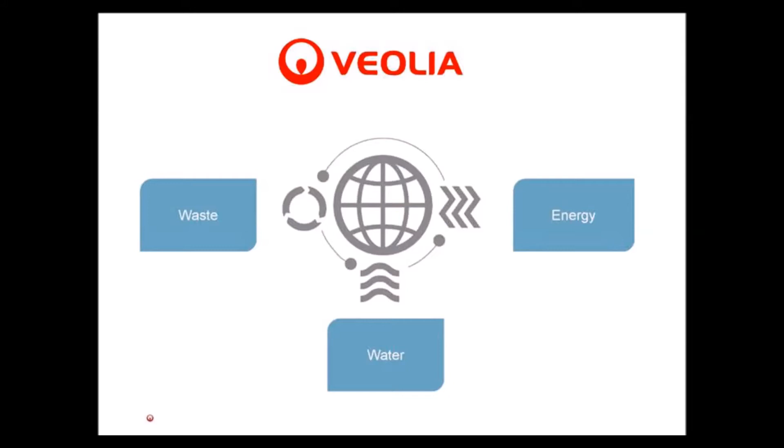So Veolia Water Technologies, as you can see, we have a wide range of solutions, dealing in design and build process water treatment systems, looking to move from borehole water quality to production quality, whether that's in the brewing industry, dairy, soft drinks, food and beverage in general, or whether it's pharmaceutical or in the healthcare industry. We have a laboratory system where we actually have a research and development system here in the UK where we actually build all this equipment as well, whether that's looking at quality control within your factories or, again, as we've already discussed, in hospitals or in healthcare.

We have systems to meet your requirements for utility water to help you meet the regulations and also to reduce costs, whether that's with boiler feed, cooling water feed or pasteurisers. We have a process wastewater treatment division. We have a large design and build solutions team based up in Birmingham, and they can deal with full treatment or partial treatment, whether we're just looking to reduce your costs on the Mogden formula or whether you're looking at full recycling through an MBR process.

Here in High Wycombe, we have our service division, and we have 64 engineers on the road at any one time, and we can offer a variety of customised service packages to meet any site's requirements. Through Hydrex, we have our water treatment chemicals business, again focusing on boilers, cooling towers, pasteurisers, anti-scalants for process water treatment. And we also have our mobile water services.

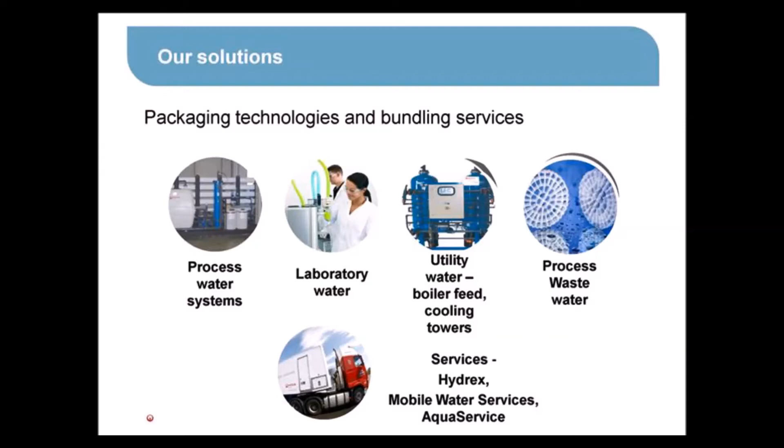So, what are the hygienic design standards that are driving these quality changes? Well, as you can see on the screen there are any number of existing legal requirements and international standards and directives that are being applied to beverage production. We have the Codex, which looks at hygienic practices for each food type, right the way through to the machine directives, and EHEDG, the European Hygienic Engineering Design Group, which look at specifying specific valves and design systems to help make the systems more hygienic.

So I think it's very interesting that under the European law, water is only classed as food from the moment it goes into the production process as a raw material or the moment it goes into a bottle. And to avoid problems with increasing hygiene legislation, we're continually being asked to look at hygienic design, not only for the water treatment plant, but the entire process. Now, whether that's a filling line or whether it's a washing line, the hygienic design doesn't just stop at a piece of equipment, it's about the entire process.

There is no actual specific guideline for water in all of those regulations. There are actually more regulations regarding conveyor belts than there are specifically for water. So it's the job of companies like ours to go through all these regulations and find out exactly what these quality drivers are that are driving the change towards hygienic design.

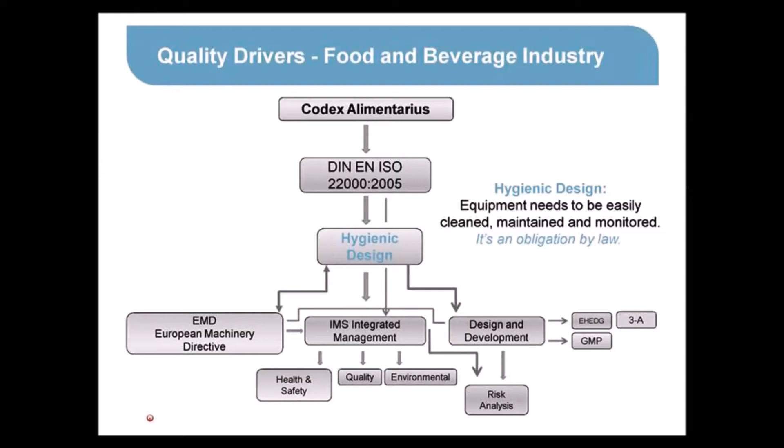If we look at market trends, and these are really quite important, what's actually trying to drive the effect of the change as well as these legislative requirements? As was recently discussed at the Campden BRI members' interest groups, chlorates and perchlorates, there is legislation coming through on these now, actually trying to find what the detectable levels that will be allowed within food and beverage going forward. And to actually aid this, there's now been technology developed to actually detect the levels of chlorates and perchlorates within beer.

So obviously the use of chlorine in water, whether it's coming from town's mains or whether you're adding chlorine for your cleaning purposes, we're going to start facing real issues right across the food and beverage industry by adding these cleaning chemicals. In terms of sustainability, how can hygienic design help here? Well, the cleaner the system, the less cleaning is required, which means increased availability of the system for production, but also less cleaning equals less chemicals or heat required, which means less energy and less waste.

So what we're trying to do is look at systems that not only apply to these market trends, but also to the legislation, so that the system that you get is future-proofed against any pending legislation. We don't want to be installing systems now that in 2 years' time don't meet the legislation and need revising. We're trying to design systems that meet all these requirements now, and therefore we have a future-proof system for the next 20 years.

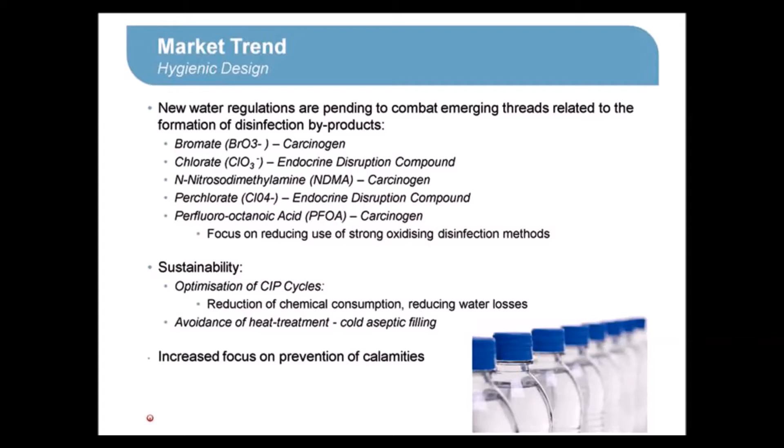So, what else is driving these market trends? Well, as we've got there, we've got maintenance. If you break into a system, you of course run the risk of introducing contamination, whether that's through bacterial infection or whether that's through using the wrong sealants, for example, or introducing swarf from pieces of processing. If you introduce contamination, you need to clean.

So obviously, increased maintenance means increased cleaning, which means increased cost, which means decreased availability of your system. So we're looking to hygienic design to help reduce the amount of maintenance required, and therefore obviously improve the amount of availability and reduce the OPEX costs of the system going forwards.

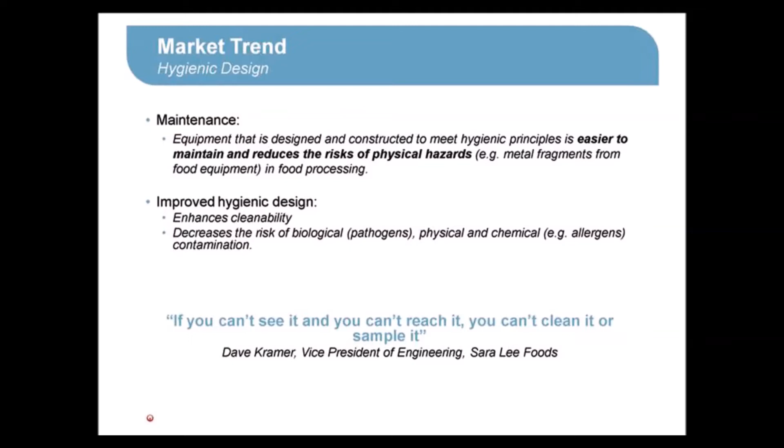So cleverer people than me have trawled through all those legislative requirements, and they've had a look at all the relevant regulations and come up with a list of what would be the demands on a system. Now, this doesn't just apply, as we've already spoken about, to the specific equipment itself, whether that's a reverse osmosis system or a carbon filter. This is going to be to the delivery system, the pipework, the interconnecting pipework, right the way through.

And so we've actually looked at systems that are designed to meet these and to meet any possible future regulation that's coming up. Now, some of these, like I said, they're interconnecting pipework with a slope. This is so we've got self-draining pipework. So a lot of these are common sense, but a lot of these have actually been legislated for and will be law.

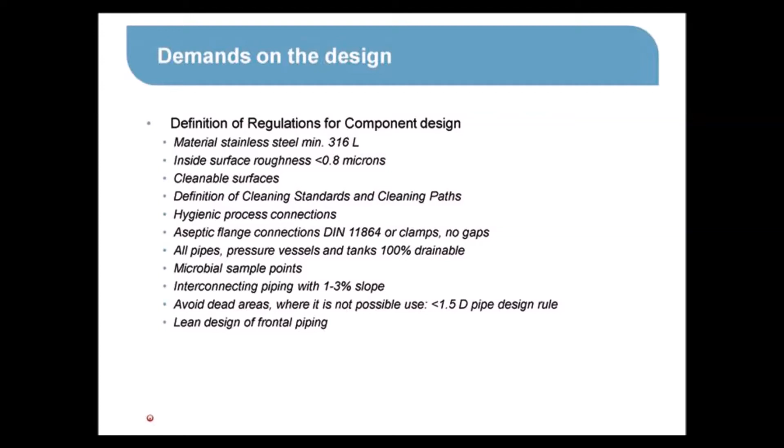So if we have a look at a couple of these in a bit more detail, this is a fairly straightforward example. You can see the example on the left-hand side where the thread doesn't quite meet on the flange there. So when we talk about aseptic, we're talking about bacteriologically free flanges. So EHEDG have guidelines as to the exact joining flanges that should be used, and it's very clear on the right-hand side there, the one with a nice tick above it, that if you don't have any gaps for water to sit and stagnate, you reduce the capability of the system to become infected.

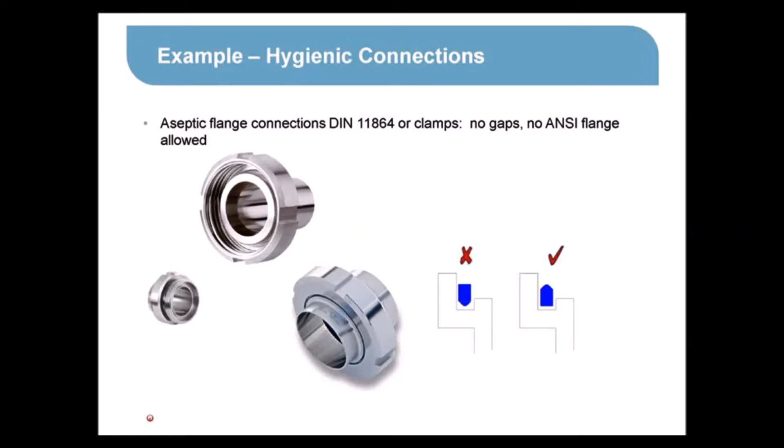If you give water the chance to sit anywhere in a low-flow environment, it will find a way, unfortunately, to become bacteriologically unsound. Now, that also applies when we're looking at piping design. So we're talking about avoidance of dead legs. Fairly straightforward, really. What we're talking about here is, A, the limit of cleanability, but also that the flow through the system prevents any stagnation of water. If the water keeps moving, it doesn't have the chance to sit still, doesn't have the chance to become bacteriologically unsound.

Now, again, as we've already spoken about, this isn't just on the pieces of equipment, this is on the interconnecting pipework and your pipework that delivers the water to where you need it within your factory.

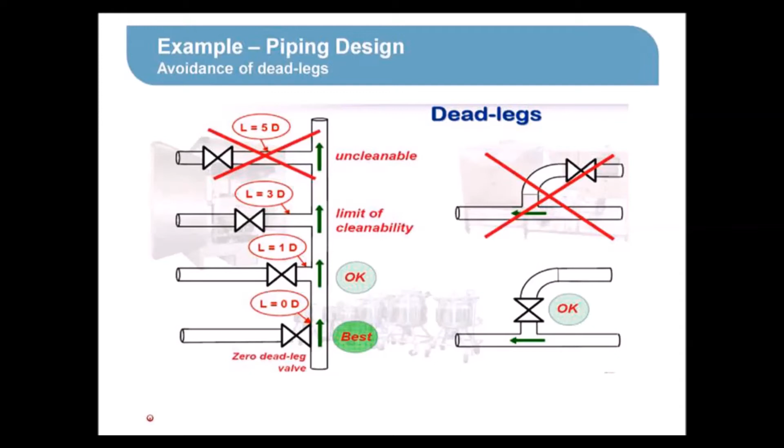Again, very, very straightforward, and something that people wouldn't necessarily think about. If you have turbulent flow through your pipe system, what you're doing is you're basically designing the flow to help keep the system clean. That's having a scouring effect across the pipework and is preventing the build-up of bacteria. So again, it's how do we help the design of the system keep the system cleaner for longer?

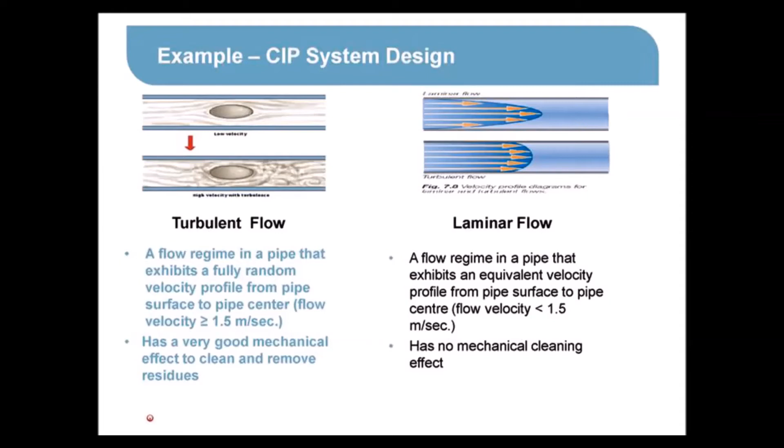If you give bacteria a place to sit and breed, it's going to sit and breed, and it's going to cause problems. A, because you're going to get contamination in your system, but B, as that bacteria starts to breed and sits there, it also starts to produce some acid, and that's actually going to attack the weld as well. So it's not just about keeping the system clean, it's also about the longevity of your system by the proper design of the system.

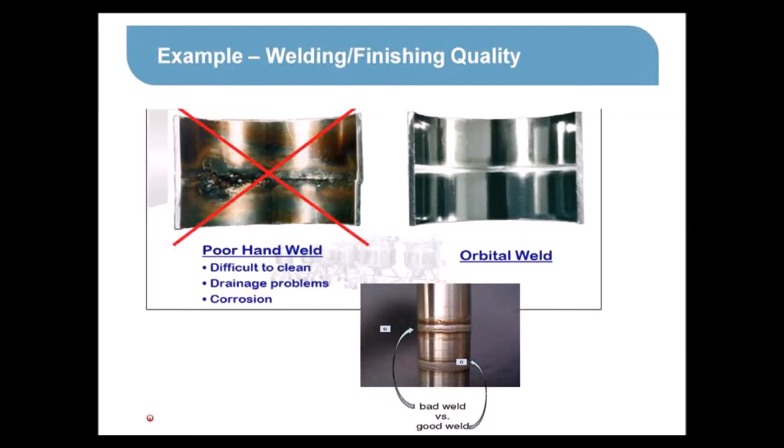So I think we've touched on this on a number of occasions through here. Hygienic design isn't specifically about one piece of equipment. It's about looking at hygienic design as a holistic approach. So it's working with a company who understands where all these legislative changes are coming from, who understands where these market trends are. It's selecting the right components, whether these are EHEDG guideline valves, for example, or flanges that we've already discussed. It's about understanding how the design comes in terms of self-draining, in terms of dead legs, but it's then what happens once the system's installed.

If you have a hygienic system, we've gone through the monitoring and the assurance of that system. If your operators don't know how to run the system properly, it will not stay hygienic. It's not about what happens on day one, it's what happens throughout the run of your factory.

And then obviously competent service. It's about having people who understand how to service your equipment. By servicing it properly, we're ensuring that we're not getting the introduction of bacteria through that service process. We're not using the wrong sealants. We're not taking any opportunity here to keep the system as bacteriologically sound as possible.

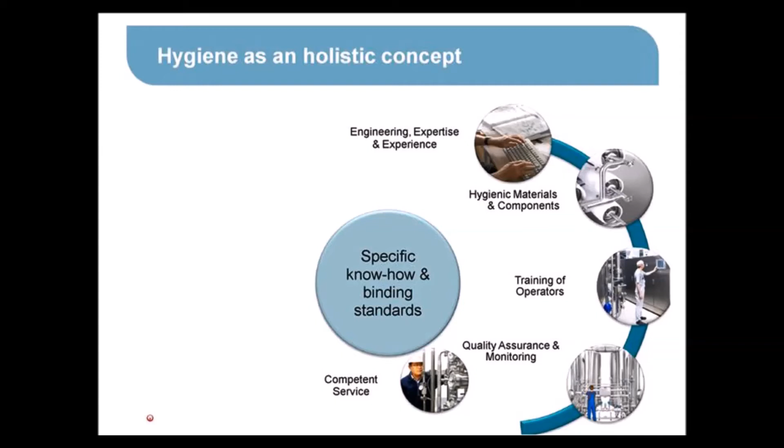Good morning. I'm the Engineering Project Manager at Greene King. To give you a little bit of background to this project and the involvement with Veolia: some 18 months ago, Greene King recognised that there were some environmental savings and, of course, cost savings to move to importing high-gravity beer. Just to clarify, one of the things we do is we have quite a large keg plant, and we tanker in third-party beers, which we keg on our own plant for distribution through our own pub network.

Obviously, there's a large cost in tankering the beer in, and by bringing it in at high gravity, we will see reduced tankers. So some of those beers will come into us, and high gravity means it's going to be trimmed by 50% with liquor or water.

When the project kicked off, everyone was excited about the accuracy of actually trimming the beer down to the correct specification. But as we progressed and looked at this project further and further, we realised actually the water was a really important part. Everyone had focused on the beer, and it's all about the beer, but actually if you're trimming by 50%, the water is 50% of your product. So we had to pay as much attention, in our view, to the water as to the beer pipes.

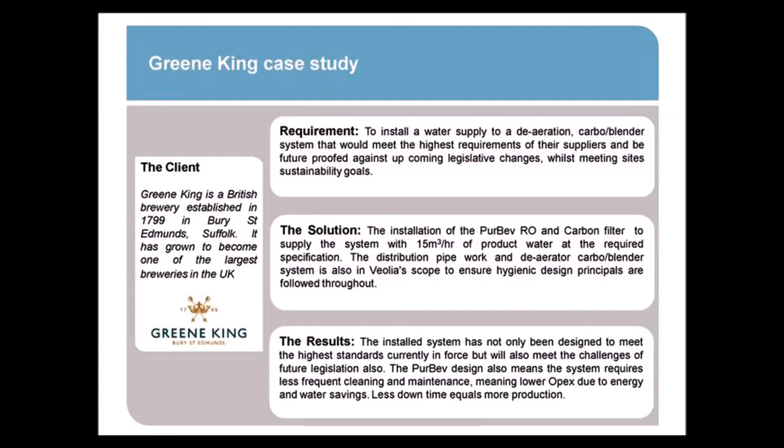So if we just have a quick summary then of what the advantages of a hygienic system are. And as we've discussed, it is a hygienic system. It's not just about an individual piece of equipment. If you improve your water quality, you improve your product quality, and you improve product safety. More and more you see every day in the press that there's been product recalls and there's been issues. The more we can minimise any of these issues, the safer you are as a company and the safer you're going to be as a brand.

So by designing systems that need less maintenance, less cleaning, obviously what we're looking at overall is systems that will be, in terms of chemical use, water use, energy savings, you're going to improve on your OPEX. But overall, it's helping you with sustainability, which is a big issue for all our companies, but it's giving you the maximum system availability because you're reducing the cleaning cycles of the system, you're improving the hygiene standards, and you're setting the benchmark for the future.

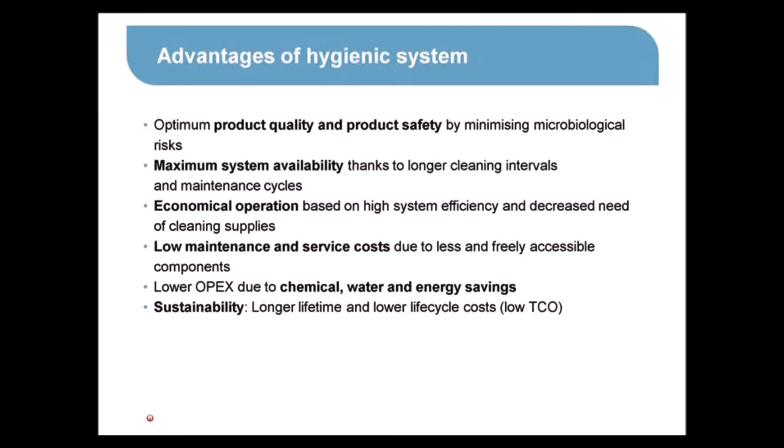So what is the PurBev series? Well, these are basically tailored to suit the specific site requirements. Now, whether that's heat sanitization or chemical CIP, what the materials of construction are, or whether it's designed to meet any hydraulic specification. These aren't a bunch of products that are just sat on the shelf and we're going to try to fit you into the nearest one. This is an understanding of what those regulations are, understanding what the needs are to meet the hygienic specification, but then also understanding everything else that's around that.

So once we know what your needs are, once we know what your requirements are, whether that's plastic up front of your equipment and then stainless steel afterwards, whether it's stainless steel right the way through because you want complete heat sanitization as opposed to chemicals, especially given the upcoming legislation on chlorates, as we've discussed. These are basically suitable to meet your requirements as a group, and also as international companies.

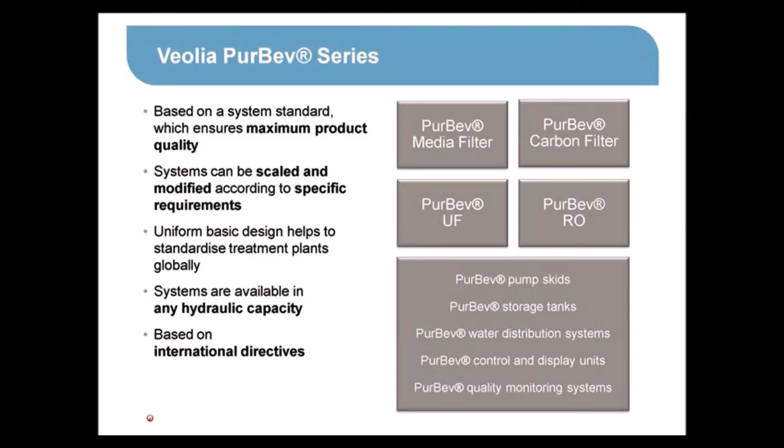As we've looked at, we ourselves are an international company, and so you can install systems that aren't just going to meet the requirements here in the UK, but will be able to meet the requirements through all your factories throughout Europe and through the rest of the world. So just to sum up really, on the PurBev range, what we have is a complete series of water treatment process equipment, whether that's carbon filtration, media filtration, ultrafiltration and reverse osmosis.